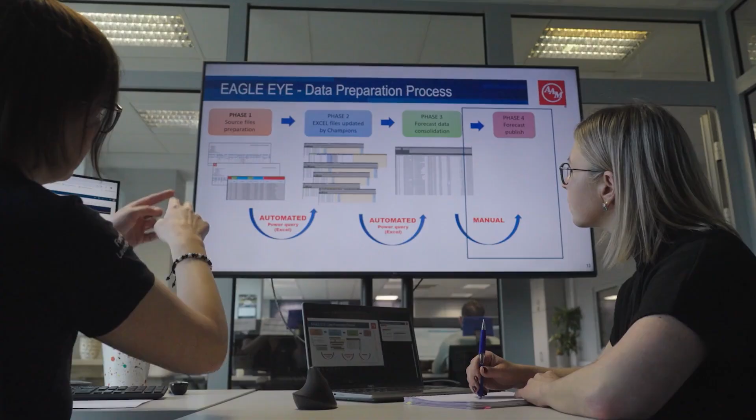My name is Tony Pistonese. I'm Executive Director, responsible for innovation and business development. What we do here is we've got a team of experienced engineers that really connect with our customers and work to try to find solutions in the driveline and propulsion space for our customers' problems.

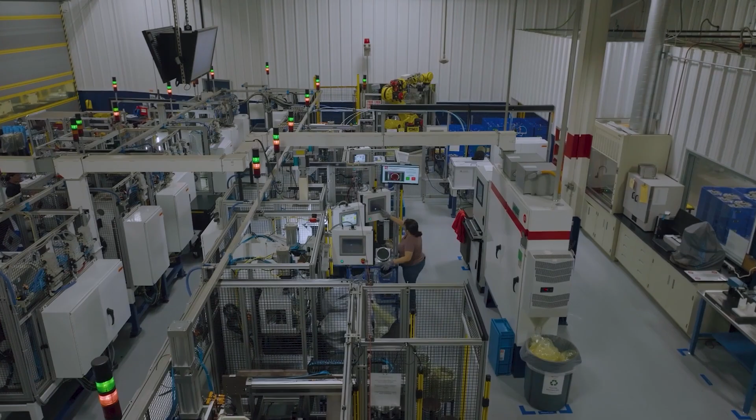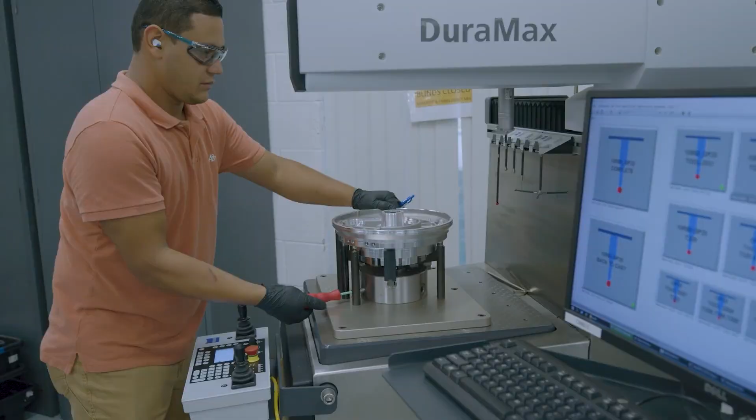Historically, the automotive environment, you'd start with a vehicle level technical specification, and then you'd have to move those requirements into system level specifications, then into component level requirements. At each of these steps, you make certain assumptions about the architecture of the vehicle. Things as simple as system voltage or phase current can really limit the amount of optimization you can do. Typically, it takes months to get from the vehicle level down to component requirements, and this is wasted time.

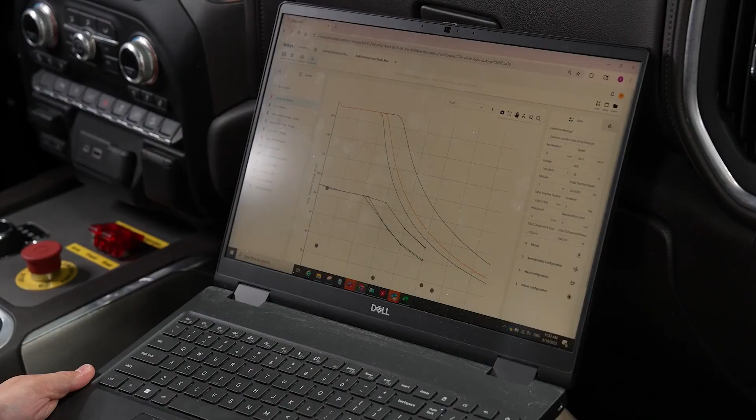Ansys and AAM share a commitment to innovation, and that's really what drove this recent collaboration. It made sense to combine forces at that point. Ansys has really been more than just a software provider. Our teams have worked closely, and they've really listened to the types of problems we're trying to solve, and have helped develop the software in a way that allows us to find unique solutions to industry problems.

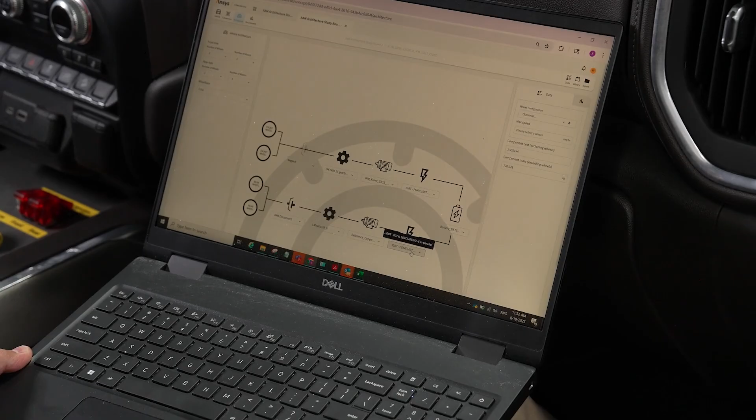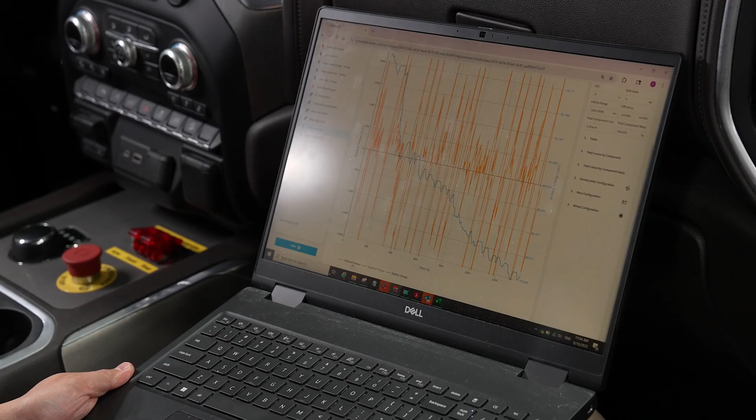We're not only refining the methodology and the tool between AAM and Ansys to study architectural decisions, but we're applying this to component level design decisions. Ansys released ConceptEV, which is a tool by which we can facilitate all of these studies to understand trade-offs and where we can really add value to the customer vehicle.

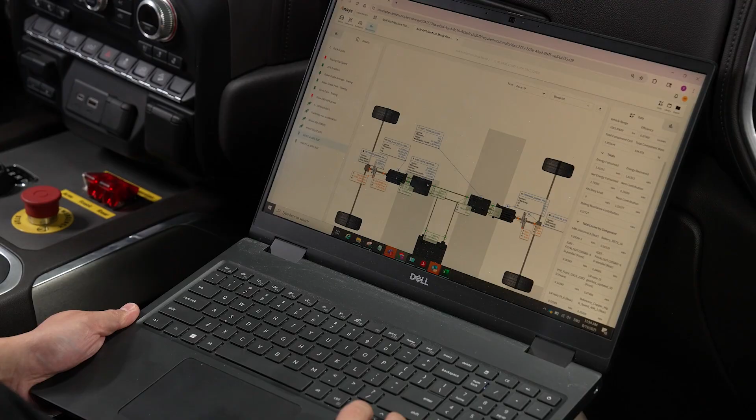ConceptEV gives us a very powerful environment where we can iterate quickly and simulate multiple different possibilities as it relates to inverters, motors, and gearboxes, and allows us to optimize across all those subsystems in a way that is not available in other software today.

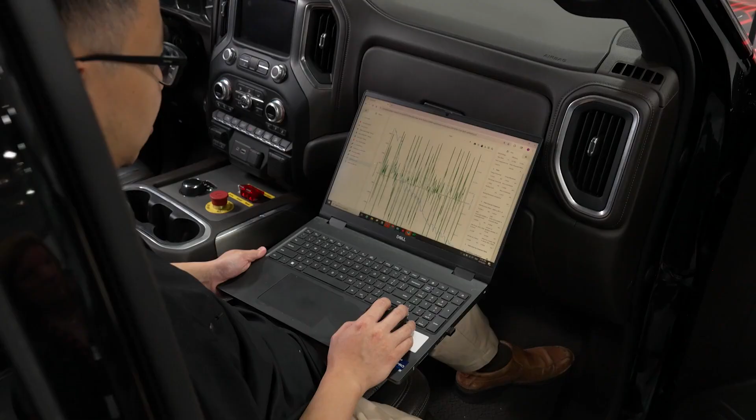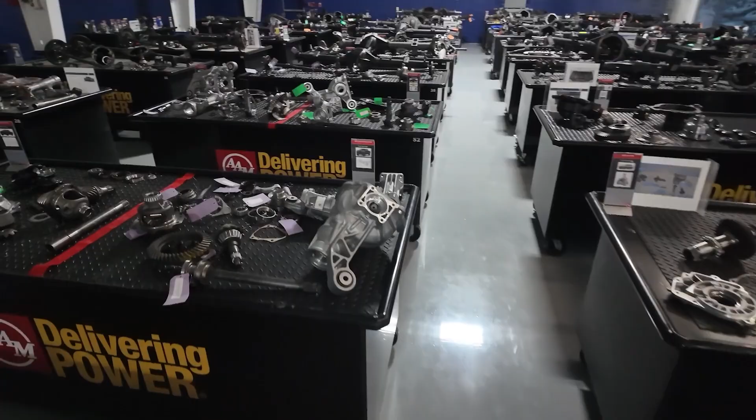With this tool, we're able to collaborate across teams. Different engineers can all operate in the same environment, adding their changes, and then evaluating at the vehicle level where it's best to spend money to get the best output. Being able to have all the engineers operating in the same simulation environment is really a benefit, because they see real time what their changes are actually doing at the vehicle level, and honestly how they compare with the other component owners.

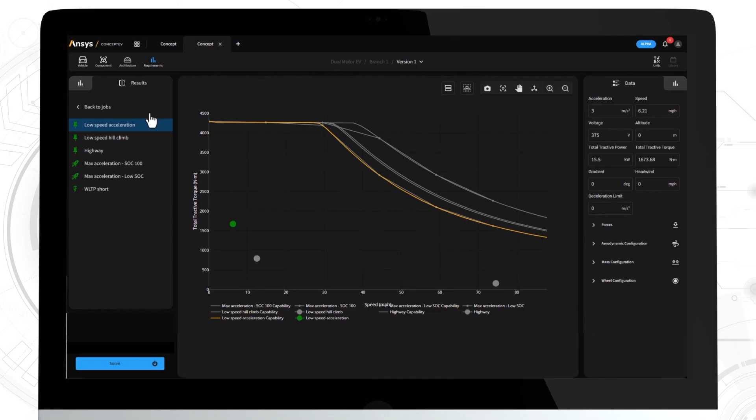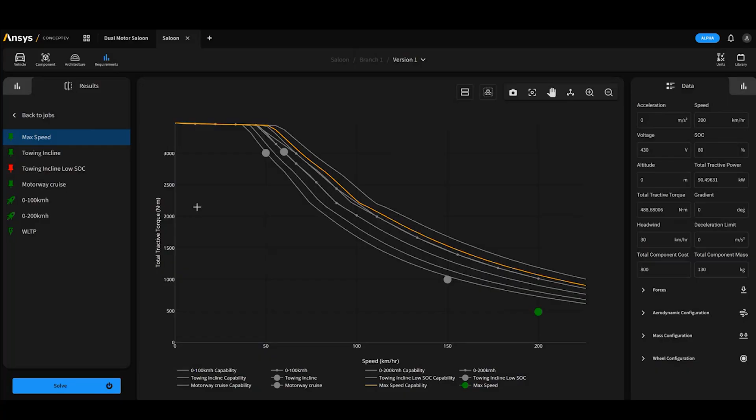One of the other areas that we've used ConceptEV internally is to evaluate various different internal innovations that we've worked on. We'll simulate those innovations and say, what does that innovation bring in terms of efficiency and cost, and how does it stack up against a range of different options that we could spend our time on? We make management decisions internally based on how some of these technologies stack up in ConceptEV versus other technologies that we've studied.

The issue without having a tool like this is that context changes from engineer to engineer. So the inverter guy might say, well, my silicon carbide provides 10% better efficiency, and isn't that worth $100? But this simulation allows you to trade that off with the battery pack or even the motor laminations to see, well, I only had to spend $20 on the motor lamination to get the same value. I'd rather spend that $20 instead of the $100 that you're talking about.

One of the things that ConceptEV allows us to do is to have real-time discussions with our customers, to be able to look at a range of different trade-offs and possibilities, and be able to explain why a given architecture provides advantages. That's important for being able to find the best solutions, but also being able to facilitate the type of communication and understanding between the organizations so that we really understand their problems and can provide the best solutions.

Having the conversations about the range of options and what those options mean in terms of attributes is critically important for us to be able to provide the best solutions to our customers.

I've seen how innovation can catalyze new products, can help create and expand markets for companies like ours, and can create benefits for our customers. That's what we do as engineers. That's why most of us went into engineering, is to solve problems and invent things, and innovation is really about doing that.